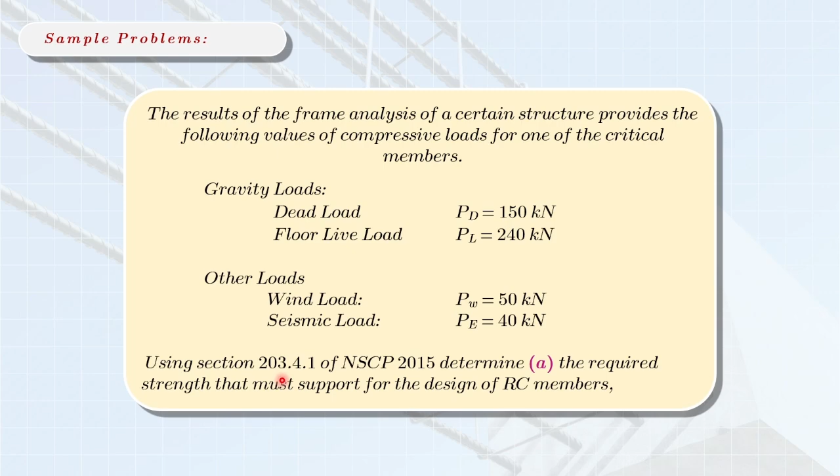Alright, so let's have the similar question. Similar question, similar givens. However, in this manner naman class, instead of using section 203.3.1, ang gagamitin naman natin dito is the section 203.4.1. Na ano ang ibig sabihin nun? Ang ibig sabihin nun class, ang gagamitin naman natin dito is using the load combination for the allowable stress or the allowable strength design, or in general, the working stress design.

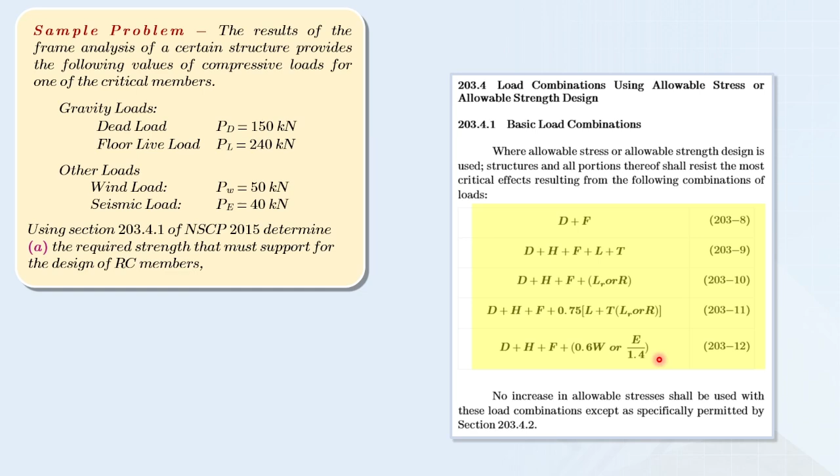Ibig sabihin lang nito, same lang siya ng mechanics from the section 203.3.1. You need to get the most critical effects coming from the 5 equations presented here. So, ganun lang ulit yung gagawin natin, no? So, we need to substitute all of the available load cases in our equation. So, starting from equation 203-8, of course, wala tayong fluid load but we have a dead load, which is the 150 kilonewton, so that our allowable strength is equal to 150 kilonewton.

By the way, mapapansin ninyo, kanina sa ating first sample problem, I'm using the subscript U. Kasi nga, this is pertaining for the ultimate strength. However, since we are using this equation, this is pertaining to the working stress design or the allowable strength design. That's why instead of using U, I will use A. So A, ibig sabihin, allowable. Okay? Yun lang yung ibig sabihin. And our first allowable strength is now equal to 150 kilonewton.

So ganun lang yung gagawin natin for the next equation. So using the equation 203-9, substitute lang natin yung mga available na load cases and we will get the second allowable strength which is equal to 390 kilonewton. Alright, so for our third allowable strength using the equation 203-10, substitute once again the available load cases. So makukuha natin dito is 150 kilonewton for our third allowable strength which is equal with our first allowable strength.

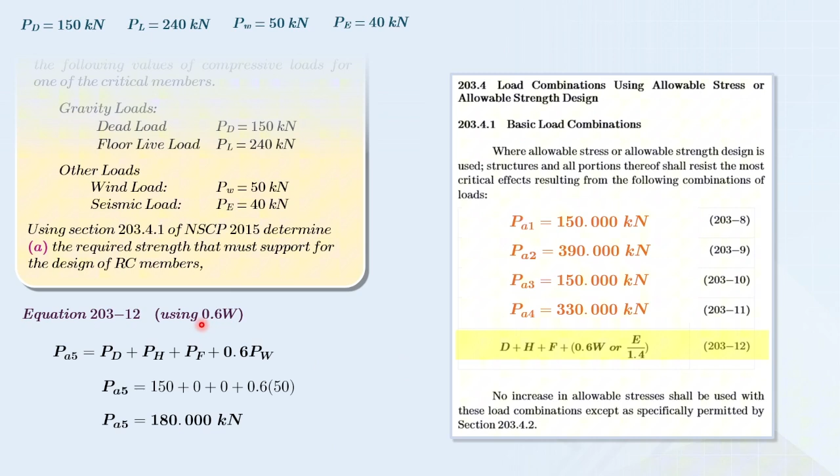Kung mapapansin ninyo sa last equation natin, you have here 0.6 W or 0.6 wind load or earthquake load over 1.4. So dito, kapag nakita kayo ng or na word dito sa ating mga equation, ang ibig sabihin lang yan, you need to substitute it separately. So una, gamitin muna natin yung unang binanggit sa condition which is the 0.6 of the wind load. So substitute lang natin siya and we will get this value of 180 kilonewton. So yan yung value niya kapag ang gagamitin mo ay 0.6 wind load.

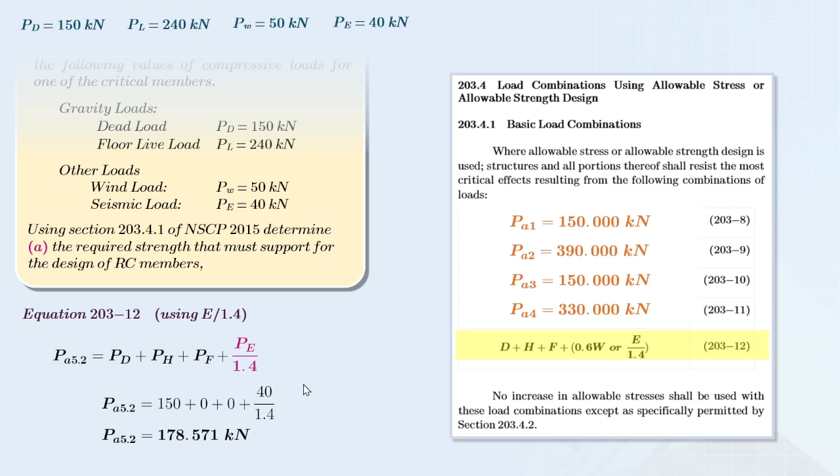However, if we will use the earthquake load over 1.4, once we substitute it, ang makukuha naman nating other value is 178.571 kilonewton. Okay, so same pa rin siya ng ating interpretation ng section 203.4.1. Kailangan natin dito hanapin yung maximum value or the largest value. Magiging 6 na kasi gumamit tayo ng 0.6 wind load and earthquake over 1.4. So among these 6 allowable strengths natin, lumalabas na ang pinakamataas ay galing sa ating second equation which is equal to 390 kilonewton. So this is our answer.

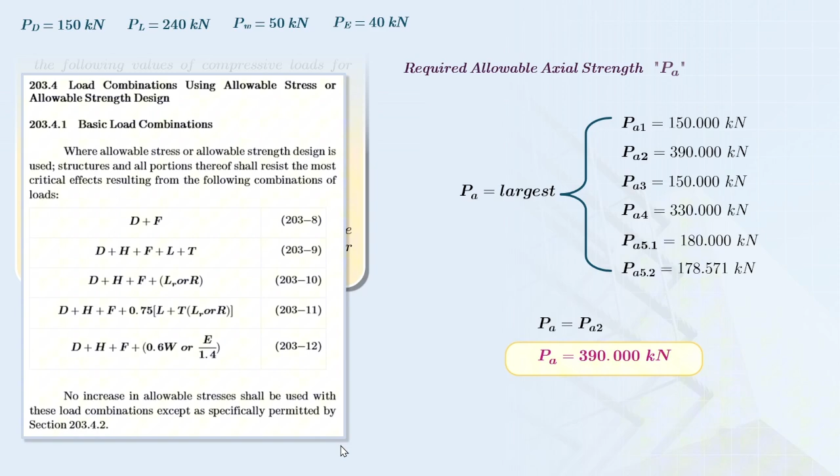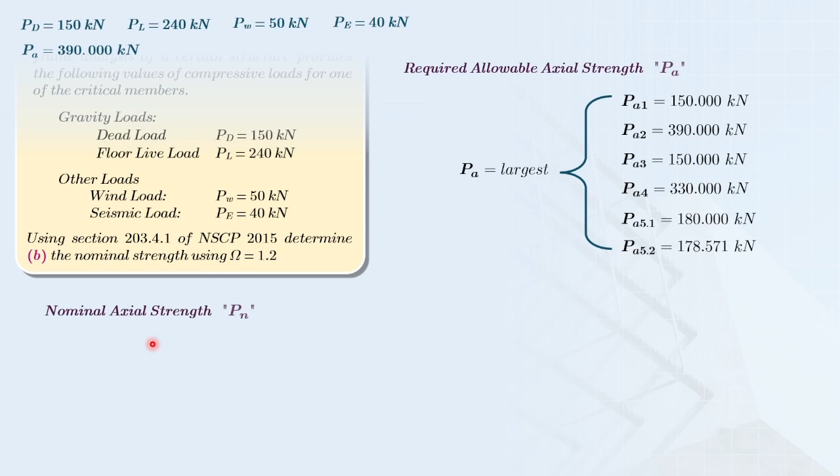And then follow-up sample problem, we need to determine the nominal strength if we are using omega equal to 1.2. So kapag nakita tayo ng omega class, this is a notation para sa working stress design. Omega stands for safety factor. So we need to determine the nominal axial strength. The ratio between the nominal strength and the safety factor should be greater than or equal to our allowable strength. But of course, we can equal it.

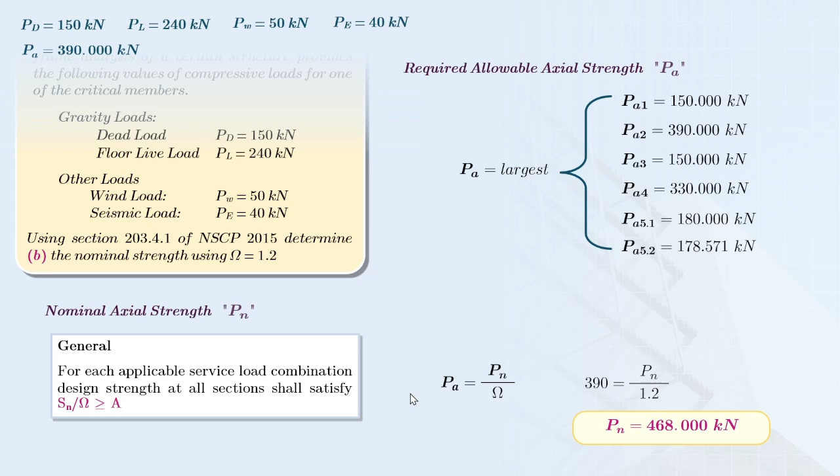Okay? So para makuha natin yung nominal strength, we need to multiply our allowable load by our safety factor. So makukuha na natin dito ang nominal strength is 468 kilonewtons. And this is our second sample problem.